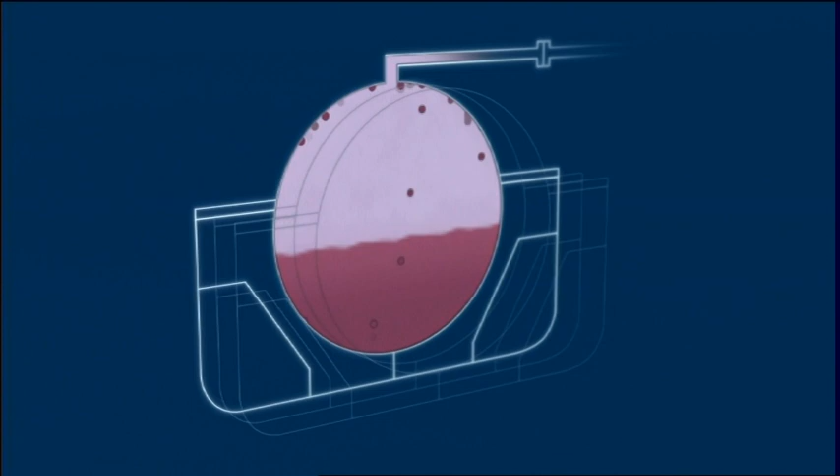But some LPG terminals still provide a vapor return line as a safety measure, only to be used if tank pressures become excessive during loading.

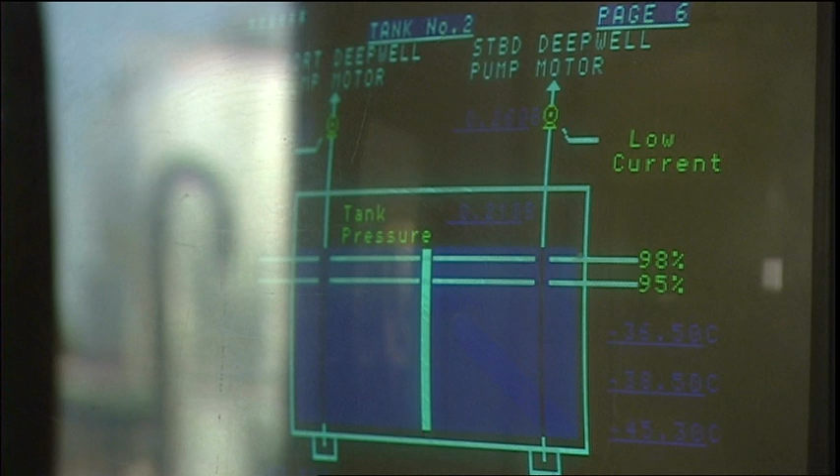Take great care to avoid such events. To avoid contamination of shore tanks, any returned LPG may be flared. This can lead to disputes over the amount of cargo loaded.

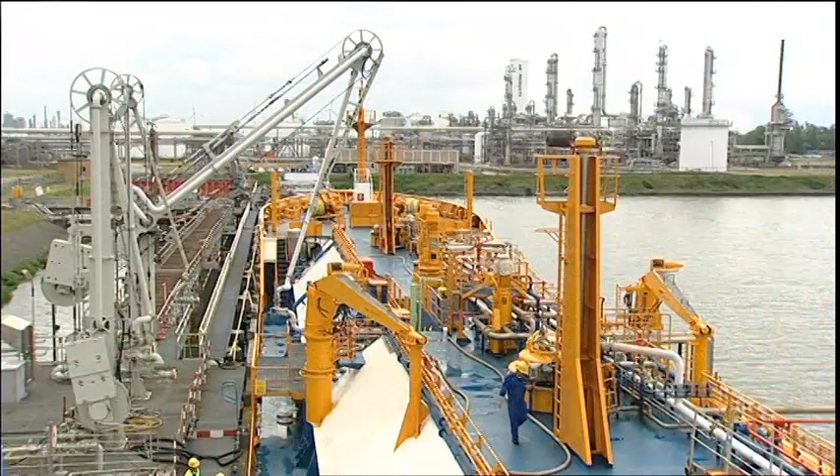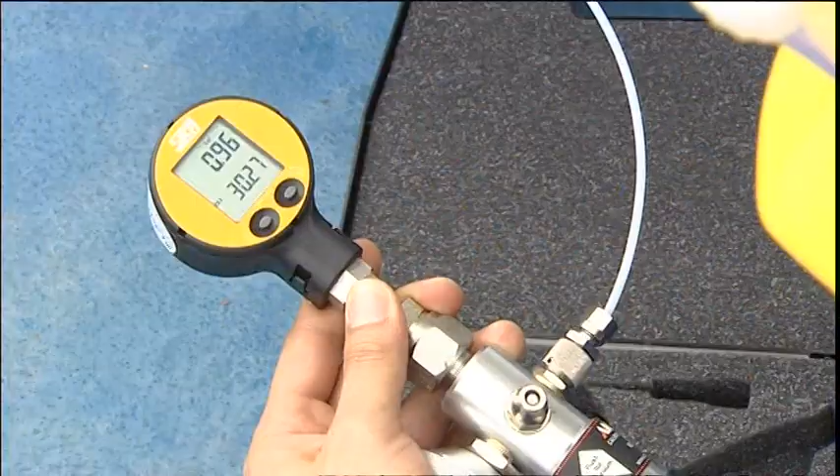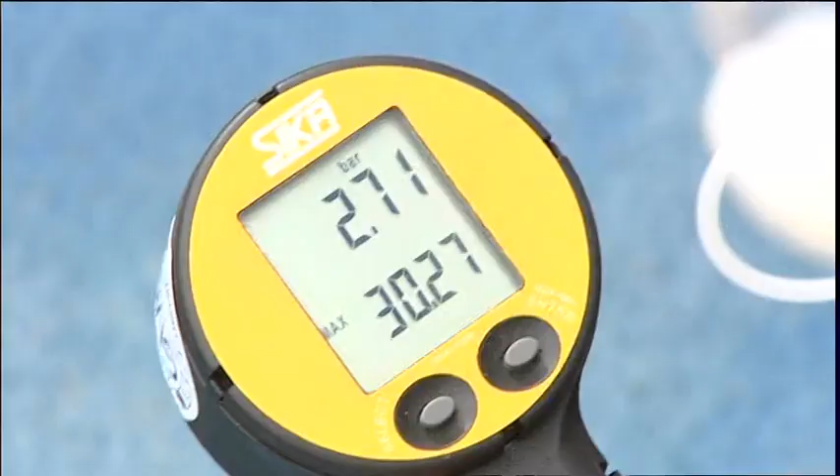The relief valves of some ships have dual settings to allow higher tank pressures during loading than when at sea. Settings must only be changed by competent staff, and any change must be logged. High-pressure alarms must also be reset, and both must be returned to the seagoing settings before the ship departs.

Loading begins. Now, and throughout the cargo operation, a close watch must be kept on flow rates, tank pressures, liquid levels, and temperatures. Their rates of change should also be carefully noted.

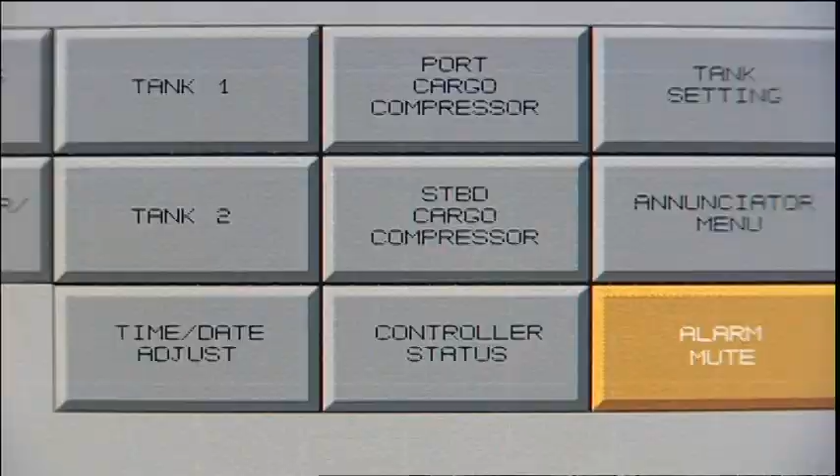If excess pressure threatens to lift relief valves, flow rates must be reduced or loading stopped. Sudden and extreme changes of temperature, flash cooling, can damage tanks and pipelines. To avoid this, pressurized ships start to load very slowly.

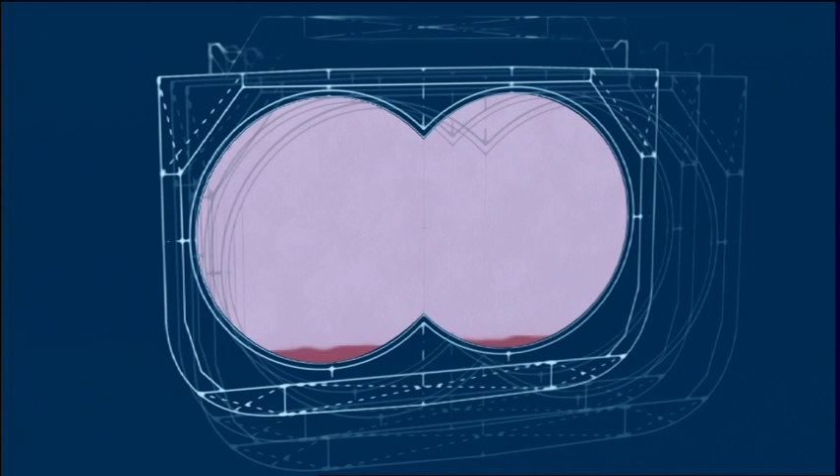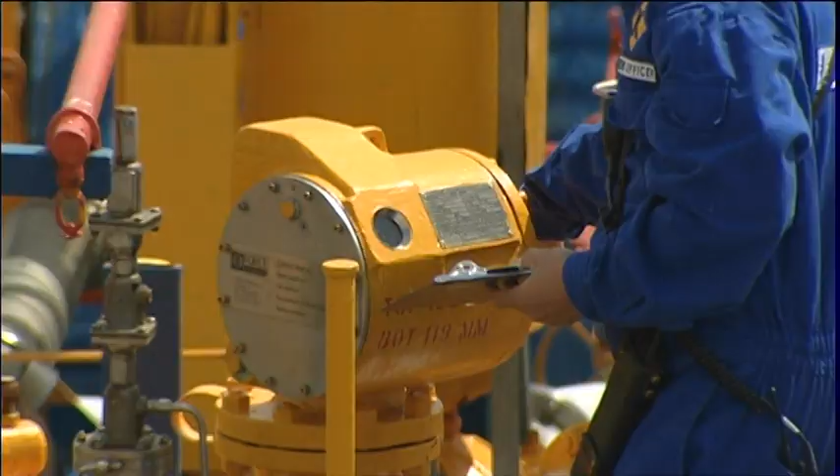Take care monitoring liquid levels. Boiling can create false readings. This can be suppressed by closing the tank's vapor suction for a few moments.

An independent inspector will often be on board to report on the quantity and quality of the cargo.

Hello, nice to meet you. Nice to meet you, I'm the surveyor. I'm here to take samples.

But he's not there to manage the operation. That's the chief officer's job, and the master is ultimately responsible.

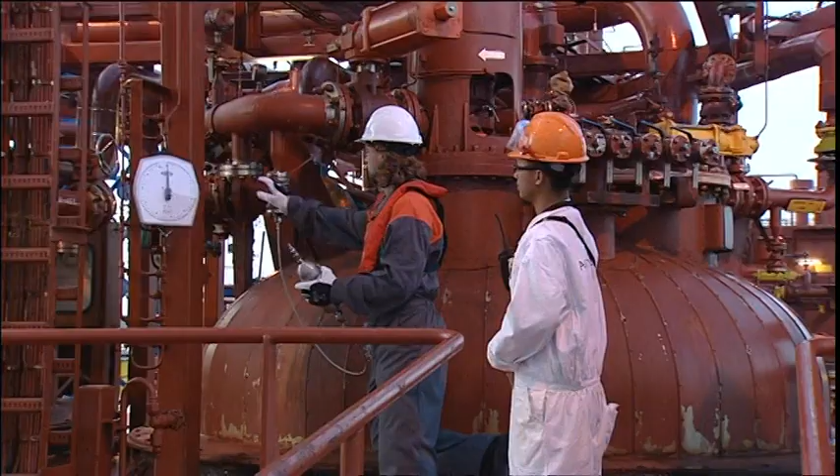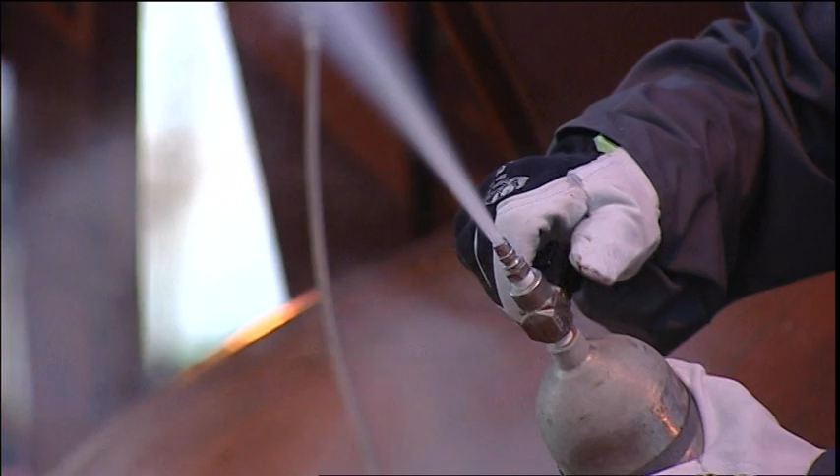An inspector is as prone to error as the next man, so it's essential to monitor his work. When you ask him to note a comment, he should do so. If he doesn't, log it instead, and make sure the ship owner is made aware.

When there's a list, it always gives problems. So it's calculating in the calculations. Do you have experience on that? Okay, all the trim and list is all corrected. This is the correct level here. You have tables for this trim correction.

If you don't agree with an inspector's interpretation of what he sees, try to reach a commercial solution. Always faster and cheaper than a legal dispute.

Thank you very much. You are welcome, sir. Okay, no problem. Bye.

If you can't come to an agreement, you must protest. Don't forget, the club is there to support you, usually with a correspondent on the spot.

Hello, this is Chief Officer of Coral Palmata speaking. Can I speak to Mr. Kethoven?

Towards the end of loading, make sure flow rates are reduced as agreed with the terminal, so that tanks can be topped off accurately.

Stuart, you'll soon be closing. Just stand by. Please let us know when it closes.

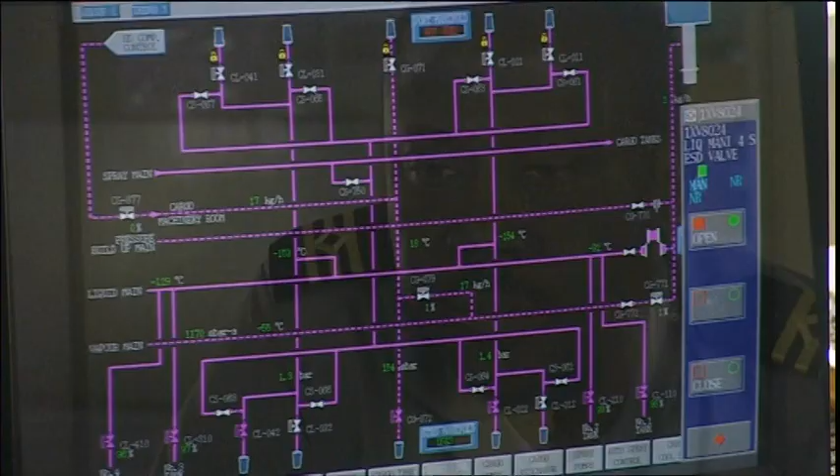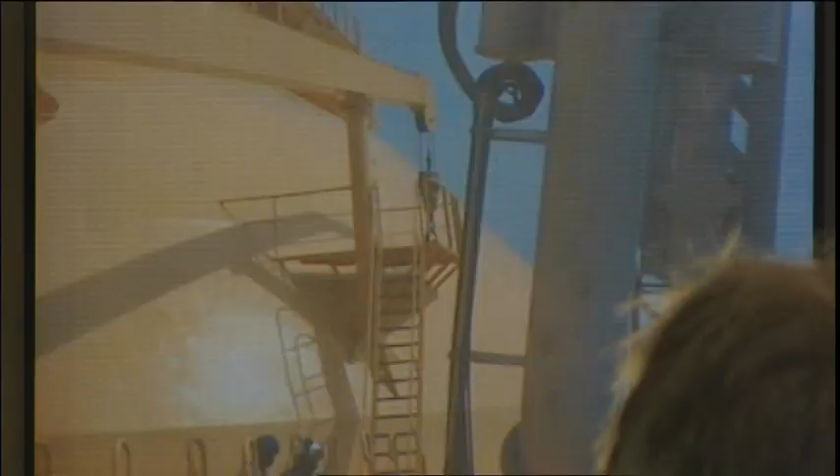Manifold valves can then be closed and pipelines cleared of liquid and depressurized. Safe working practices require hard arms, hoses and pipelines at the manifold to be purged of vapor before disconnecting.

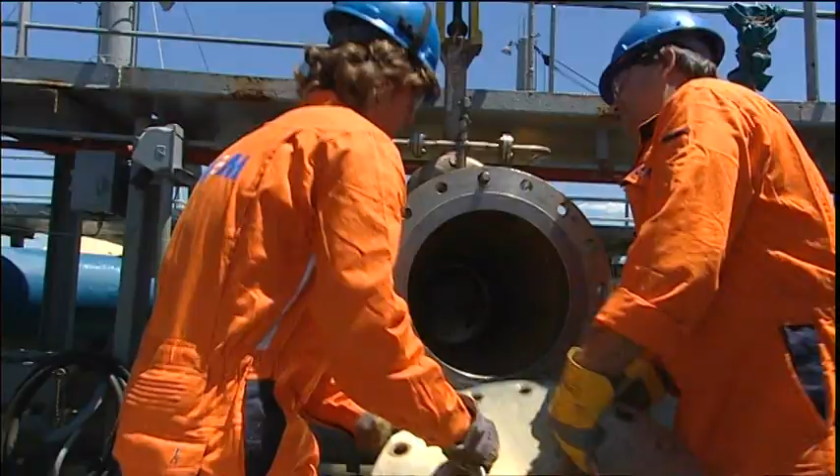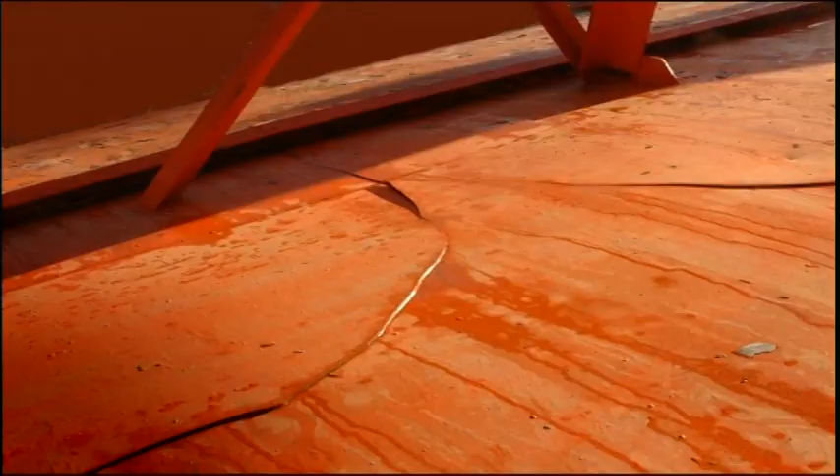Leaking valves and flanges have resulted in serious incidents. LPG and chemical gas risks include fire, explosion, and asphyxiation. The lower temperature of LNG causes structural damage to ships as well.

Remember, check that all health, safety, environmental, and security measures are in place. Agree who will be responsible for what. Agree the cargo plan and sign it.

Inspectors make mistakes, so monitor their work. If you can't come to an agreement, you must protest. The UK club will support you, usually with a correspondent on the spot.

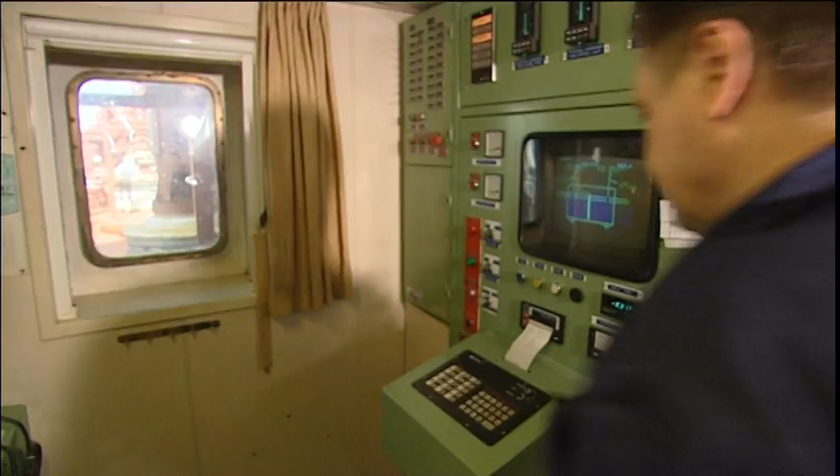Throughout the loaded voyage, carry out charterer's instructions diligently and record that you've done so. All refrigerated and semi-pressurized gas carriers need to maintain strict control of cargo temperature and pressure.

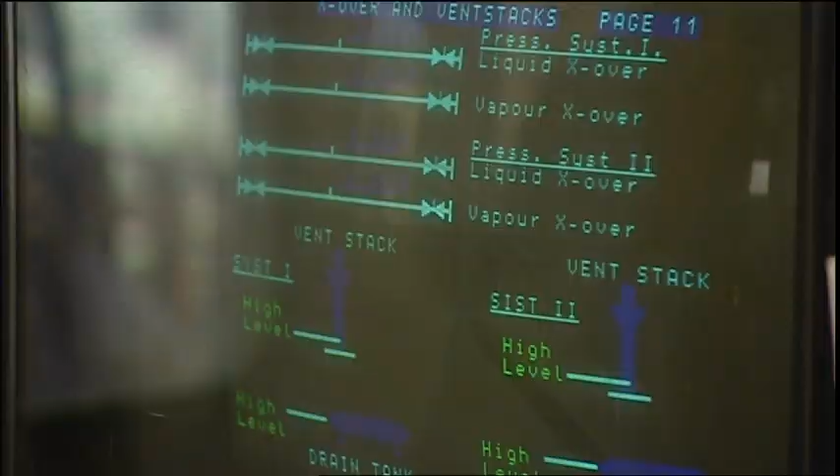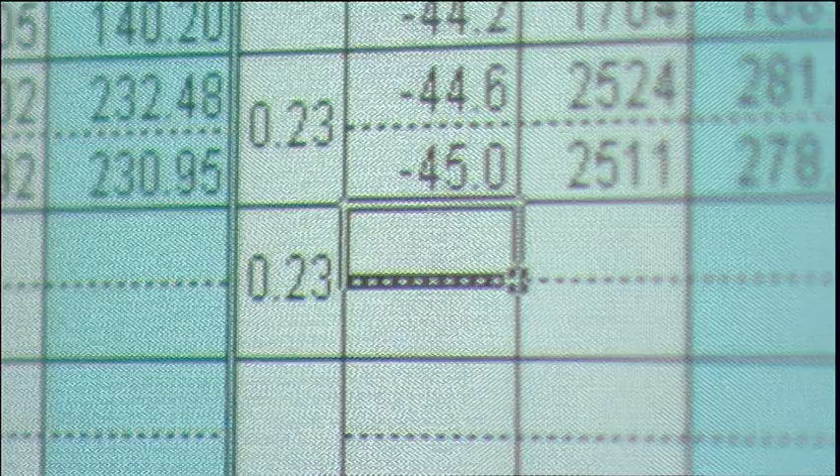Many LPG cargoes are required to be discharged at a temperature below that of the shore tanks and must therefore be cooled. This isn't always straightforward.

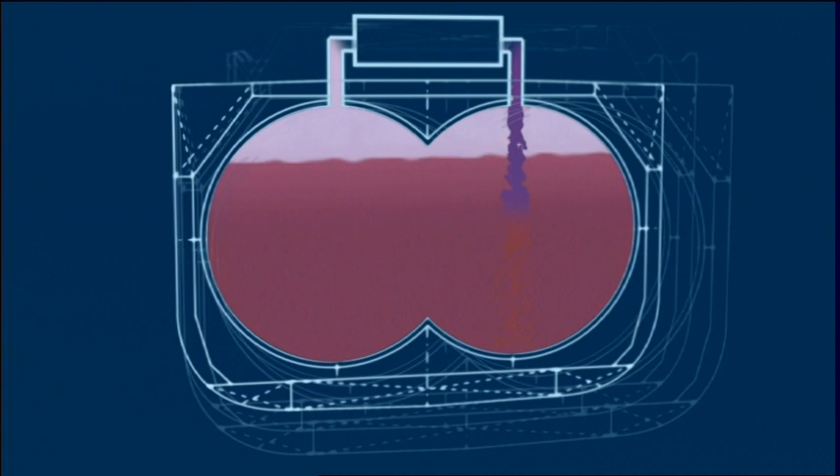If condensed gas from the reliquefaction plant is returned to the top of a tank, the vapor pressure will quickly drop, but the liquid cargo will have cooled very little. To ensure proper circulation and cooling, the condensed gas should be returned to the bottom of the tank.

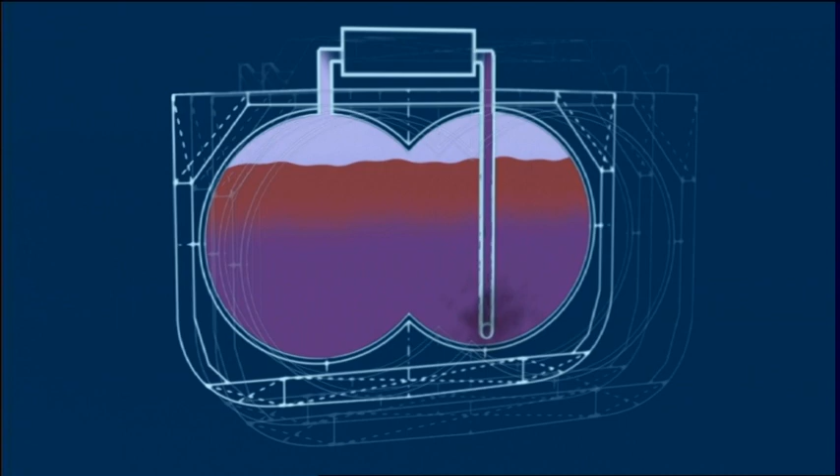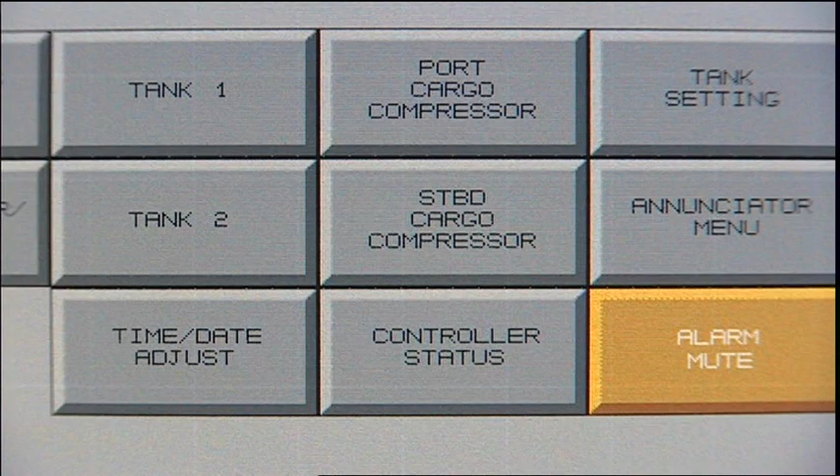Remember, inhibitors won't stop cargoes polymerizing in their vapor phase. For cargoes such as butadiene and vinyl chloride, select a suitable maximum discharge temperature for the compressor.

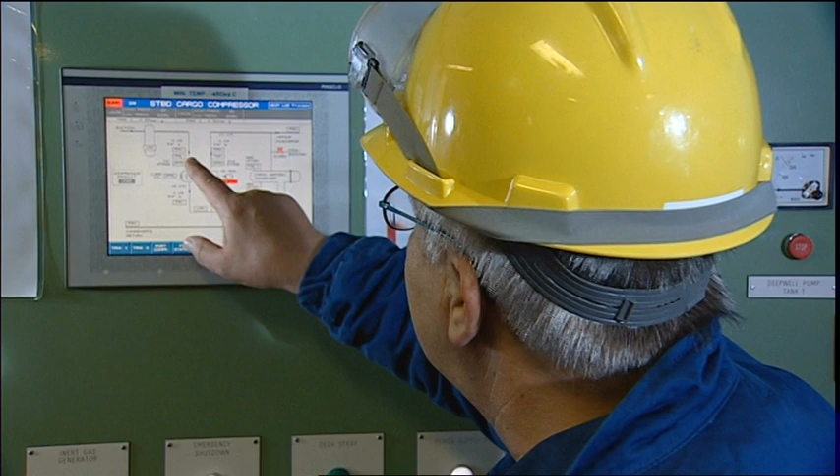Heavy weather can play havoc with cargo cooling. As the ship rolls, liquid cargo may enter the compressor via the vapor suction line and disable it. Check the liquid traps regularly and test the level alarms.

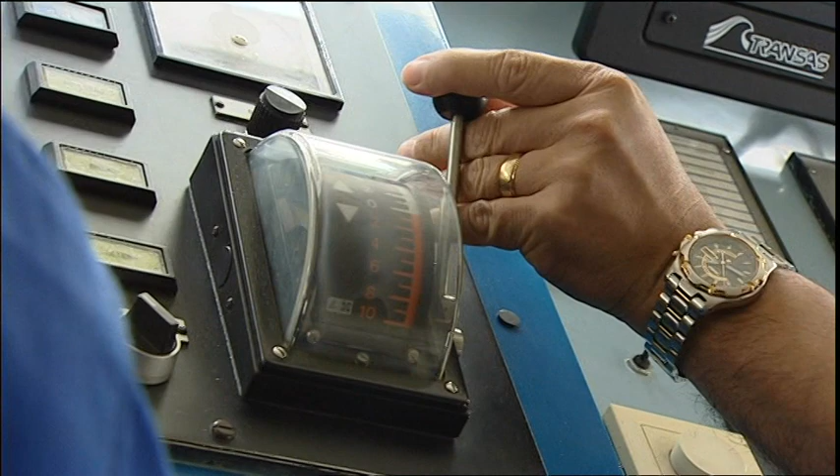If conditions disrupt cargo cooling, logging the fact can help defend any claims against the ship.

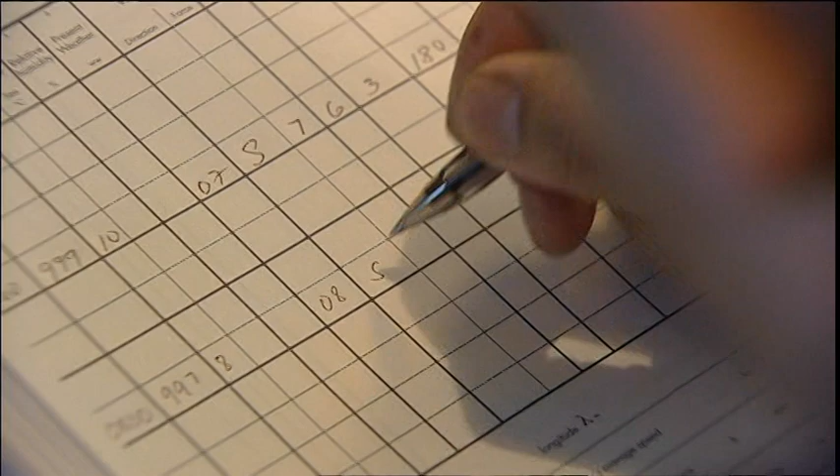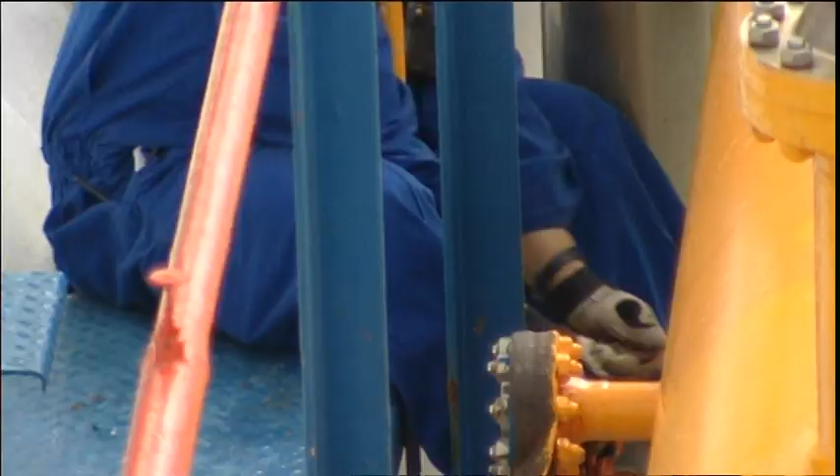If the cargo heater is to be used at the discharge port, testing it for leaks before arrival can save long and costly delays.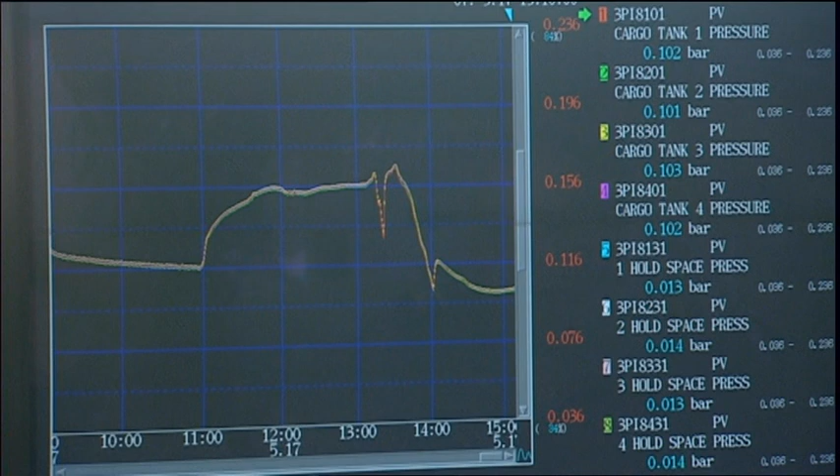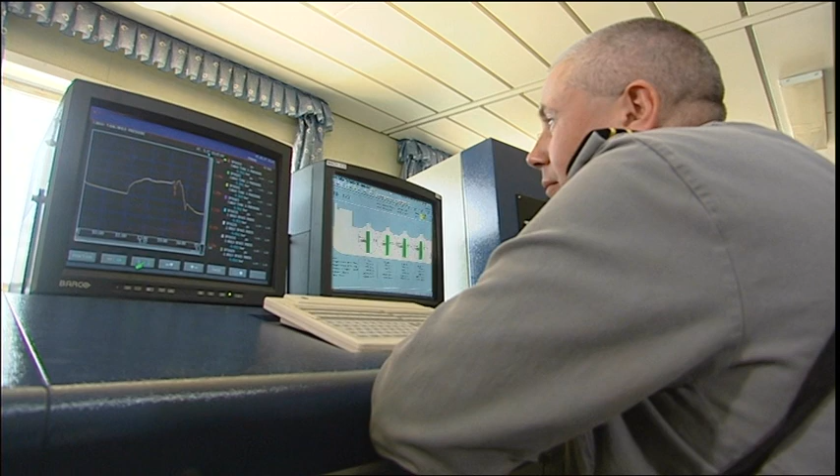On most LNG carriers, natural boil-off vapors aren't reliquefied. They're used to fuel the boilers, which generate steam for their turbine engines. But the amount of boil-off gas varies with air temperature and sea conditions, so a close watch must be kept on tank pressures. LNG terminals often specify a maximum tank pressure for arriving ships. On the other hand, to prevent the risk of creating a flammable mixture of gas and air, tank pressure must never fall below atmospheric.

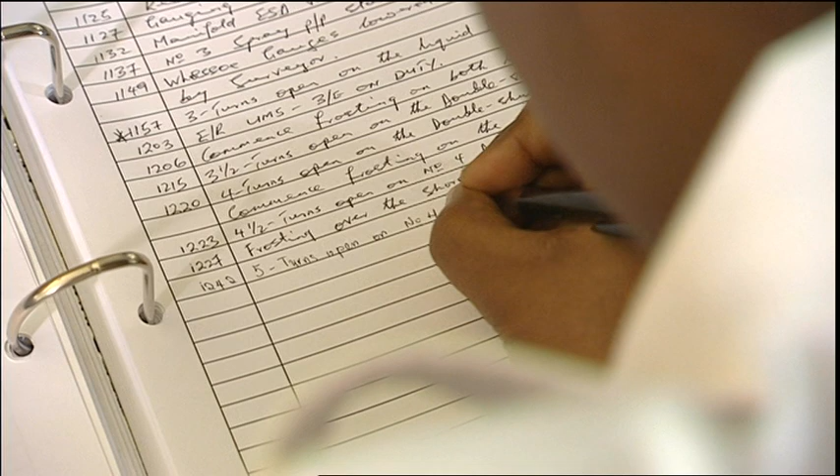Whatever the type of ship and cargo, be sure to log the care you've taken. If a claim occurs, good records can be the best defense.

Remember, carry out charterer's instructions diligently. Log the care you've taken with cargo. Good records are the best defense against claims.

Making sure that the ship arrives with the specified cargo tank temperatures and pressures helps achieve maximum discharge rates.

Manifold draining. So once we finish our side draining...

Before discharging, ship and shore staff will meet to agree on all operational and safety procedures to be followed.

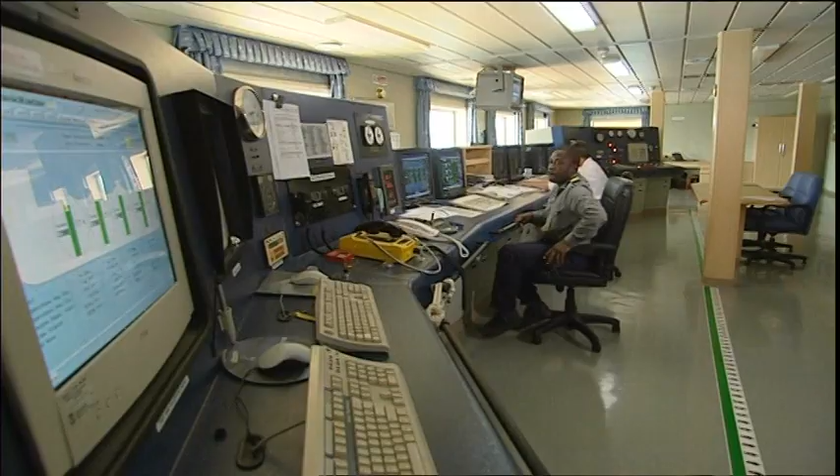Discharging and ballasting must be carefully controlled to maintain stability and minimize hull stress.

Tank pressures tend to fall during cargo operations, slowing the rate of discharge.

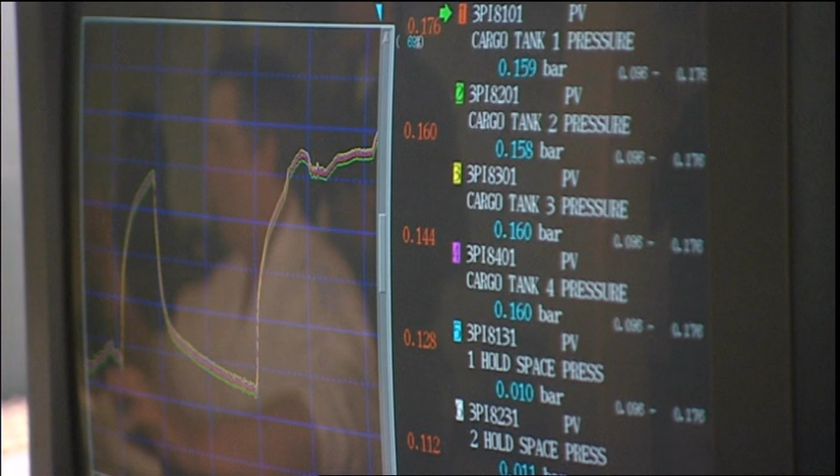When you're clear, let us know. We'll start the test. All okay on tank one?

To prevent pressures falling, vapor can be added to the tank, generally from the terminal.

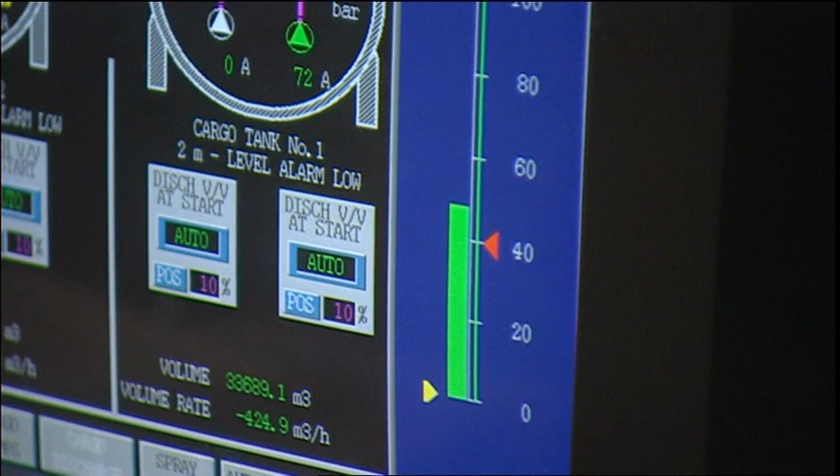Cargo engineer is coming out there. The cargo tanks which are loaded are number 1, number 2 port, and starboard.

Cooperate with any independent inspector, but remember, it's the chief officer's job to manage cargo operations.

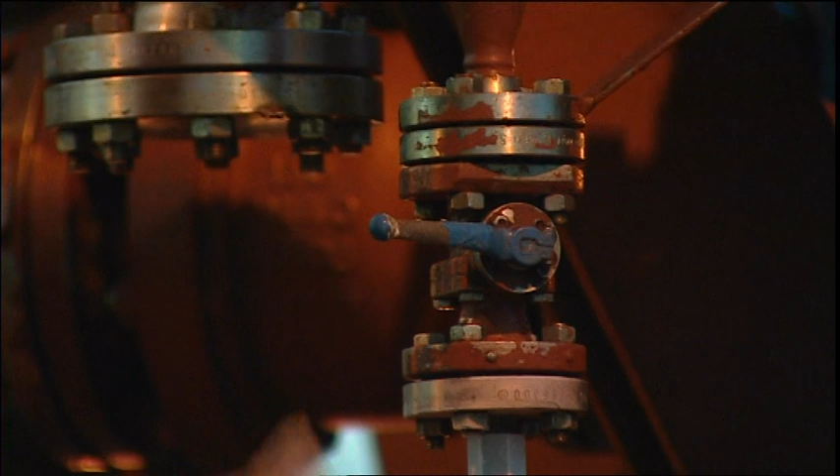Make sure that the cargo is sampled properly and that its quality is accepted before discharge starts.

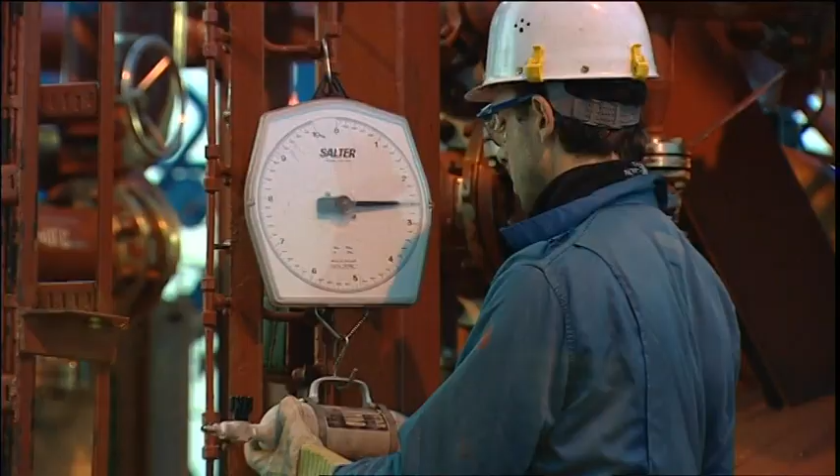If any dispute arises, contact the UK Club correspondent.

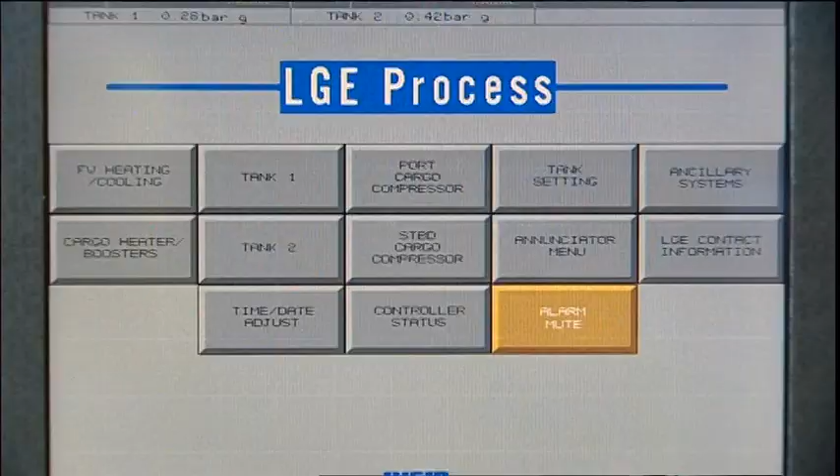To transfer refrigerated cargo into pressurized storage, it must first be warmed up using the ship's booster pump and cargo heater. The pump and heater must be cooled down slowly to avoid damage, so cargo must be introduced gradually.

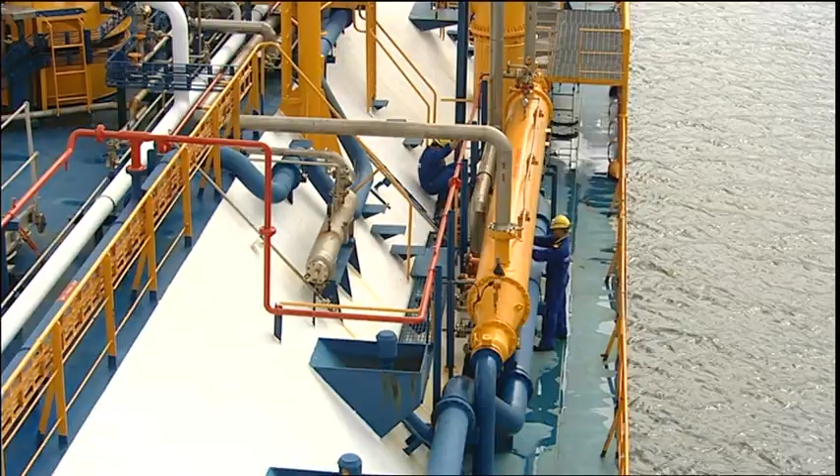Seawater is the usual heat source, but it can easily freeze, halting cargo discharge and damaging the heater. To avoid this, never let the outlet temperature drop below the limits recommended by the manufacturer.

Apart from a heel of liquefied gas retained on board to keep tanks cool on the ballast voyage, and on LNG ships to be used as fuel, all the cargo has been transferred.

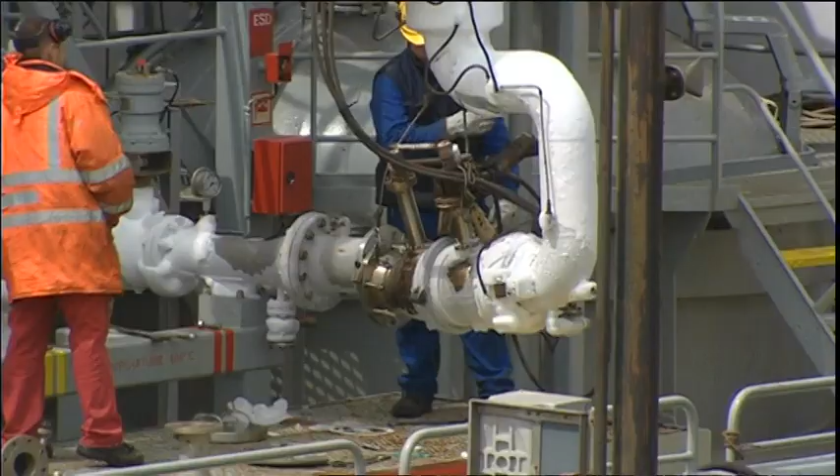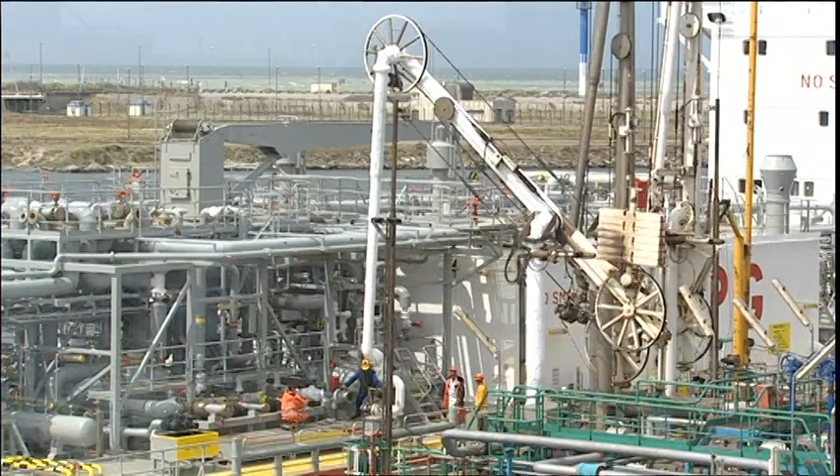Now the deck lines and hard arms must be drained, purged with nitrogen, depressurized and disconnected. Only then may the ship-shore connection be broken.

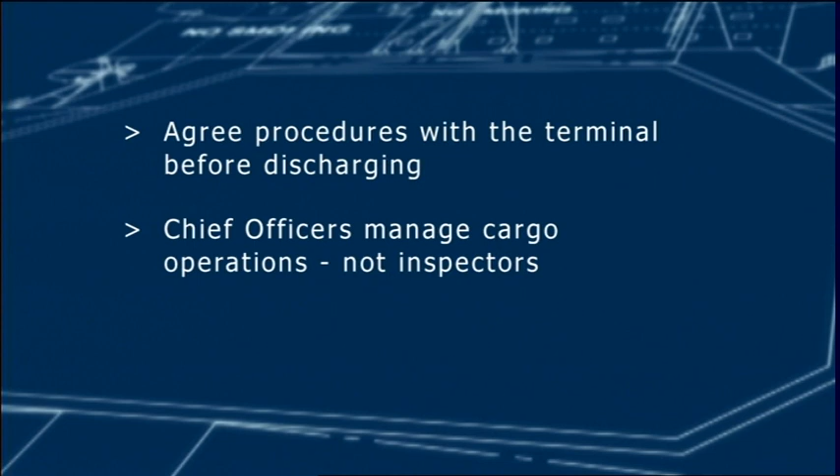Remember, agree operational and safety procedures with the terminal before discharging. Chief officers manage cargo operations, not inspectors. Contact the UK Club if any dispute arises.

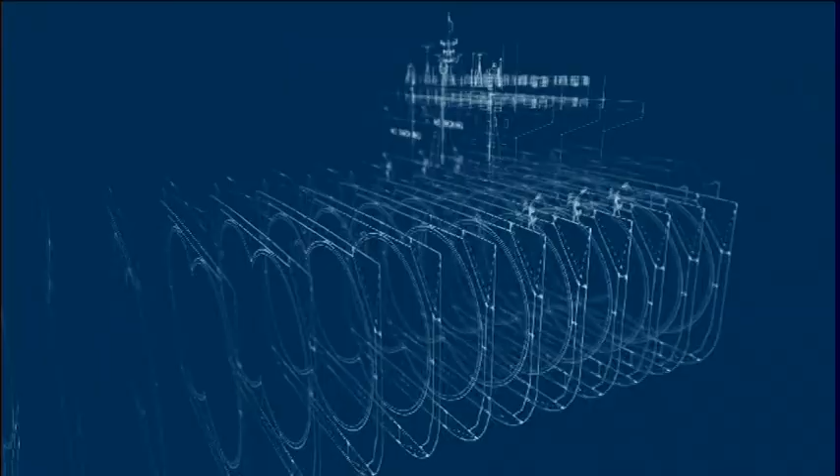Unlike LNG ships, LPG and chemical gas ships may carry a variety of cargoes. If the next cargo isn't compatible with the previous one, it may be necessary for the tanks to be gas-freed. Depending on the cargo previously carried and the one that will follow it, this can involve as many as 4 steps.

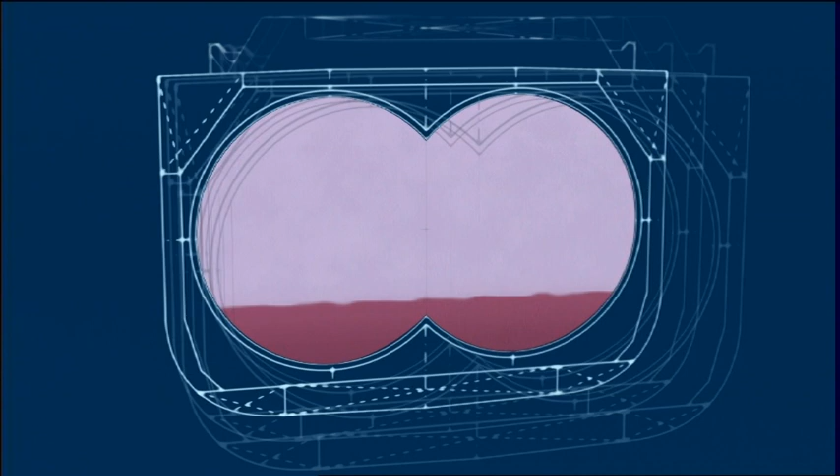Removing leftover liquid cargo, warming the tanks, inerting, and finally, ventilating with air.

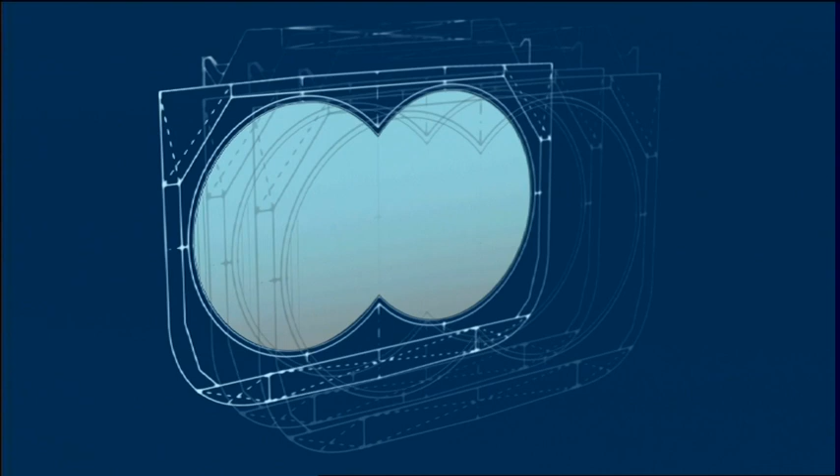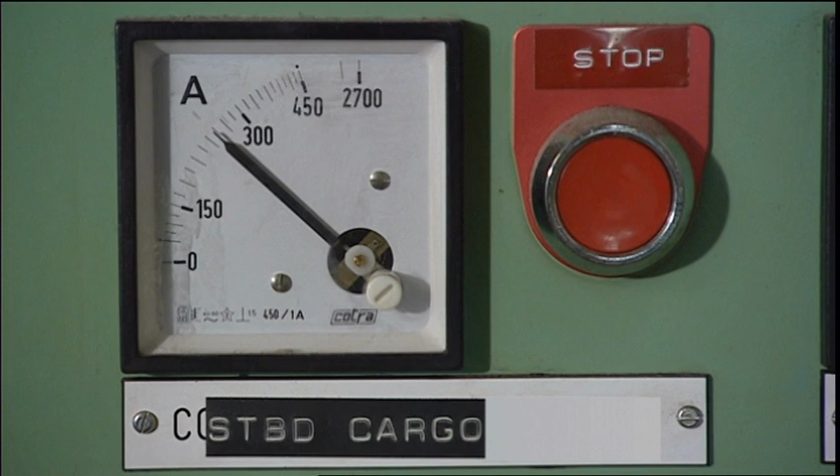Different ships have different ways of removing leftover liquid cargo, but it must be done thoroughly. In a non-saturated environment, it evaporates vigorously, supercooling the tank to breaking point.

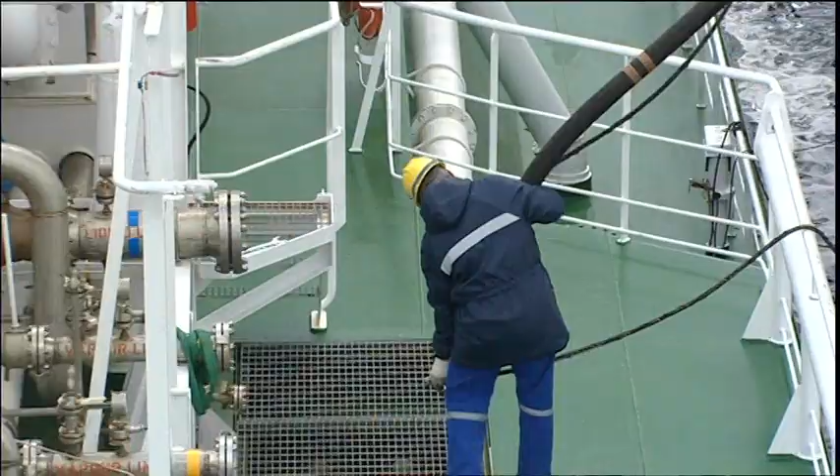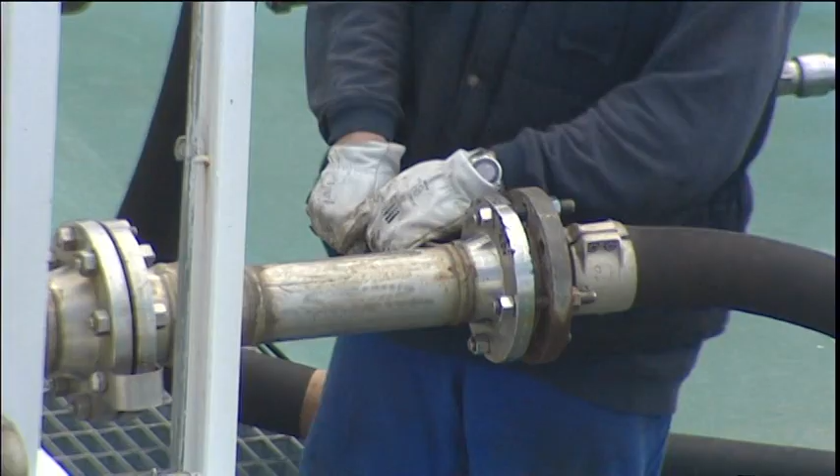At sea, cargo vapor may be vented. In port, you must store it aboard or pump it to a vapor recovery unit.

If inert gas is pumped into a tank that's cold, any moisture or carbon dioxide may freeze. To avoid this, warm cargo vapors are circulated first.

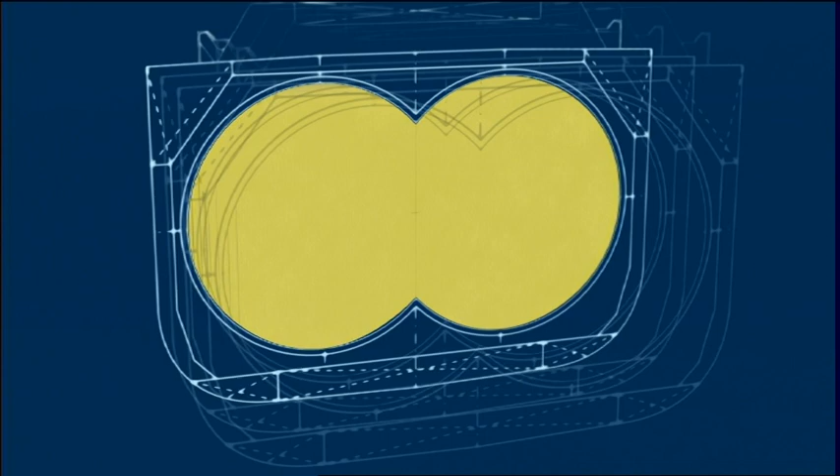The rate of warm-up should be carefully controlled in accordance with the shipbuilder's guidance.

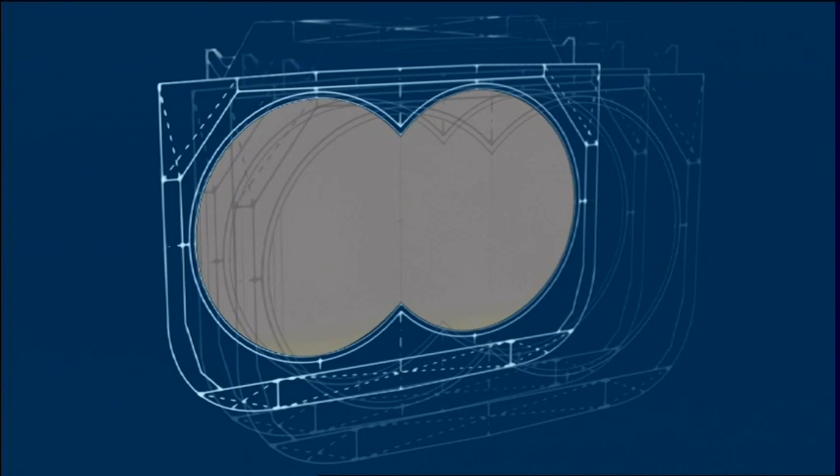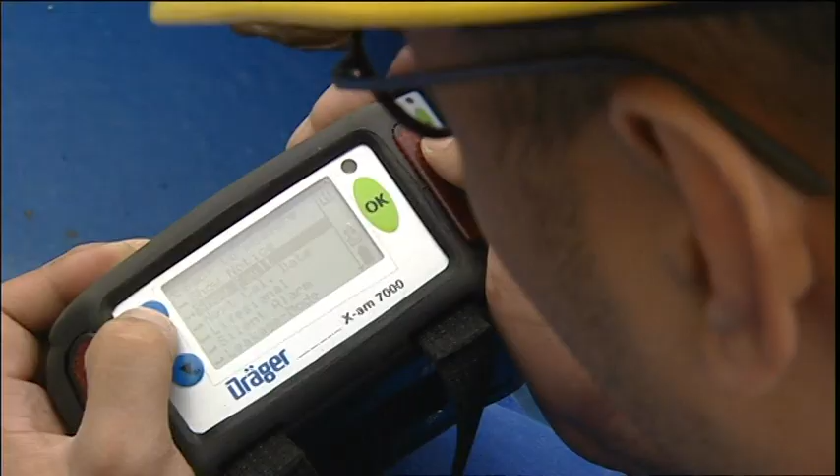Now the tank can be inerted if necessary, and always when it's to be opened for inspection. Inerting prevents the formation of a flammable mixture of cargo and oxygen when air is introduced. The remaining cargo vapor is sampled until its concentration is below its lower explosive limit.

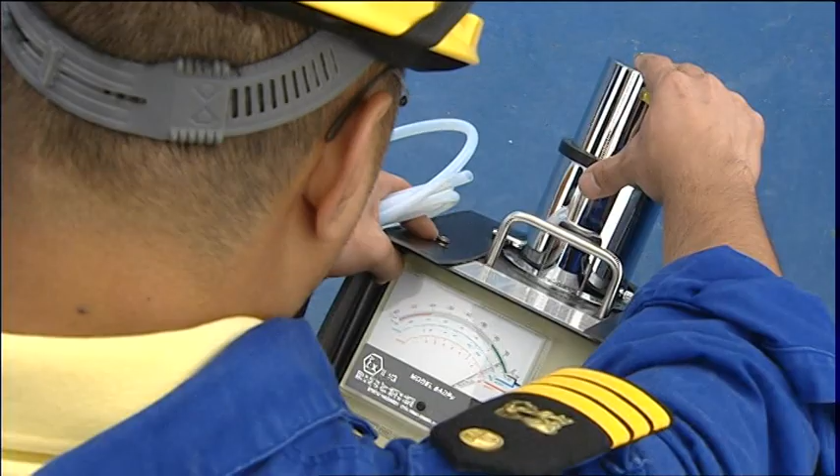Finally, the tank may be ventilated with air if necessary. The tank must be at ambient temperature and the air dry, or else condensation will form. It will have to be removed, a long and costly job.

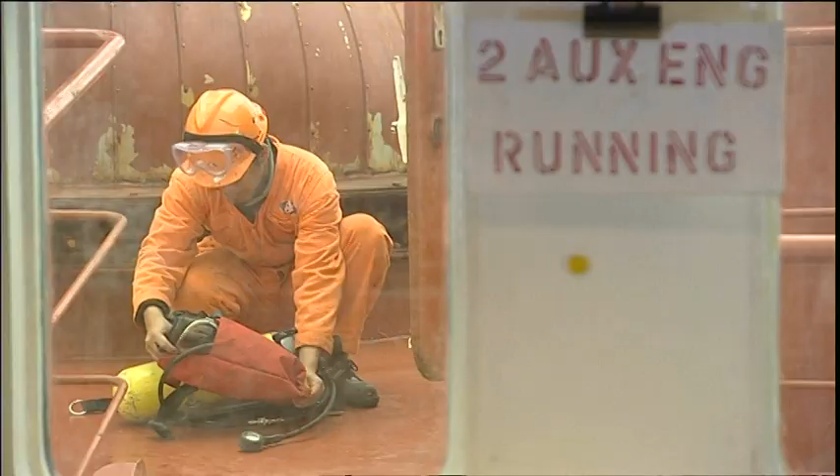Whatever the commercial pressures, nobody must enter a tank until tests for cargo vapors have been carried out and the level of oxygen is 21%. And don't overlook carbon monoxide. When the oxygen level's okay...